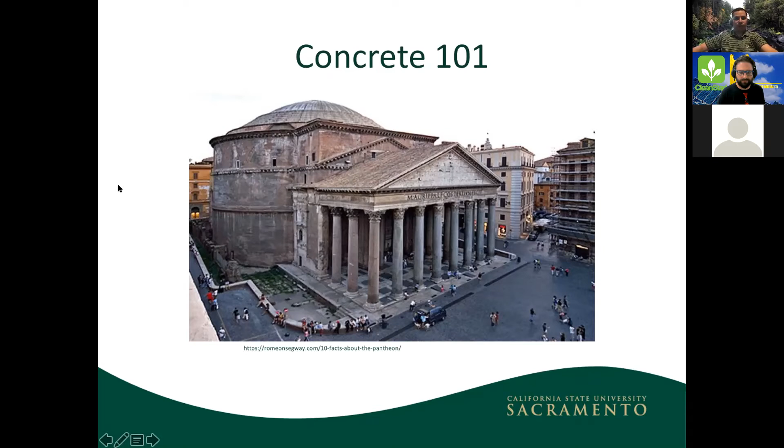All right, so going back to one of my biggest pet peeves, cement and concrete are often used interchangeably, and they're different things. So just to make sure that we're all on the same page, I would like to speak a little bit about concrete and cement and give you a little bit of background information, because that's going to be relevant for the presentation today. So cement is actually not equal to concrete. Cement is the gray powder. Concrete is the solid stuff, and cement is an ingredient that's required to make concrete.

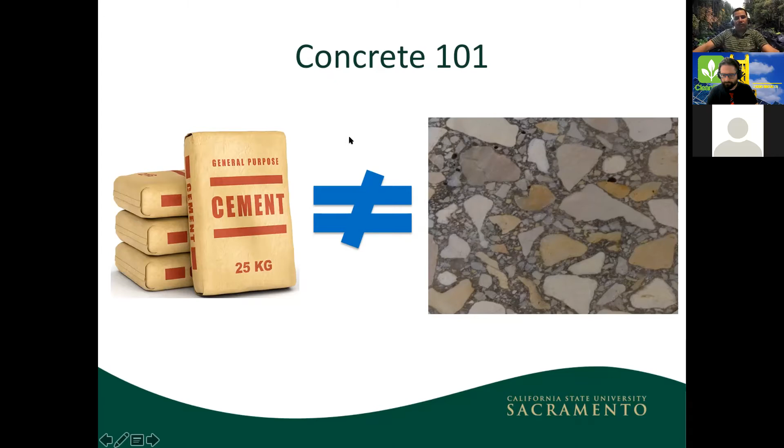So the analogy that a lot of people like to use is the analogy of a cake. Cement is to concrete as flour is to cake. And this works out great because if you look up, for example, fruitcake, you can see that looks very, very similar to concrete, where we have the cement and the water combined to form a paste. That's what holds the cake together. The rest of it is aggregate, basically sand and rocks.

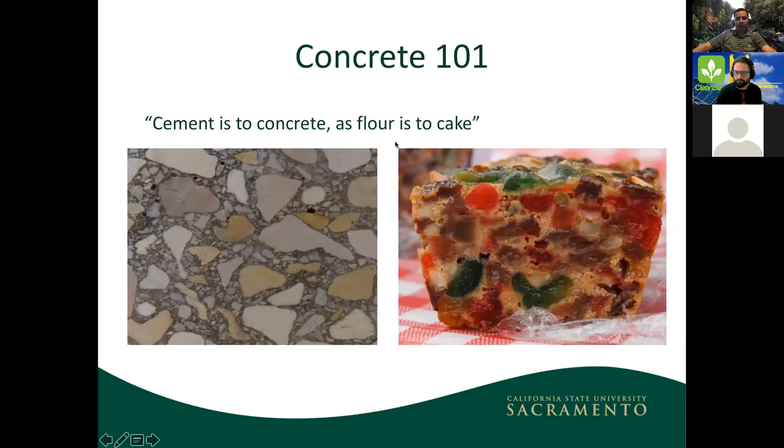That's the vast majority of the concrete that's held together by that binder, by that paste. Okay. If we were to look at it in a little bit more detail, this is what's required to make concrete. I have to have some cement, the gray powder. I have to have some water. Here's my rock and here's my sand. I get all 4 ingredients.

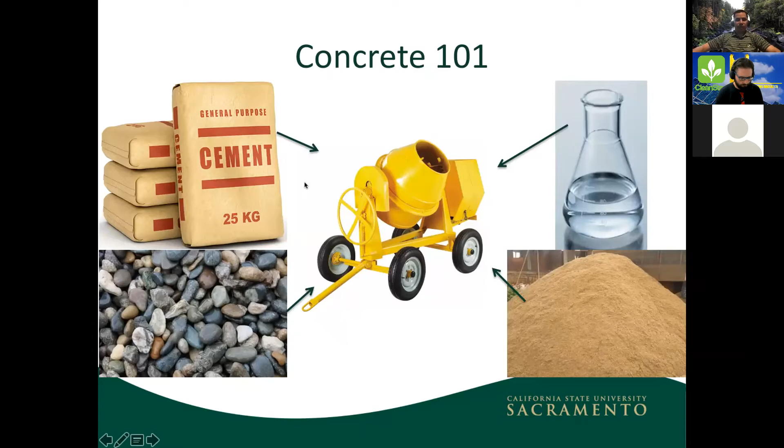I throw them into a mixer, mix for a few minutes, and then I get this material that's going to start out as a liquid. It's going to flow and it's going to take any shape that I want. And after a few hours, it's going to turn into a solid. You can get very creative with it, but this is just your basic plain concrete.

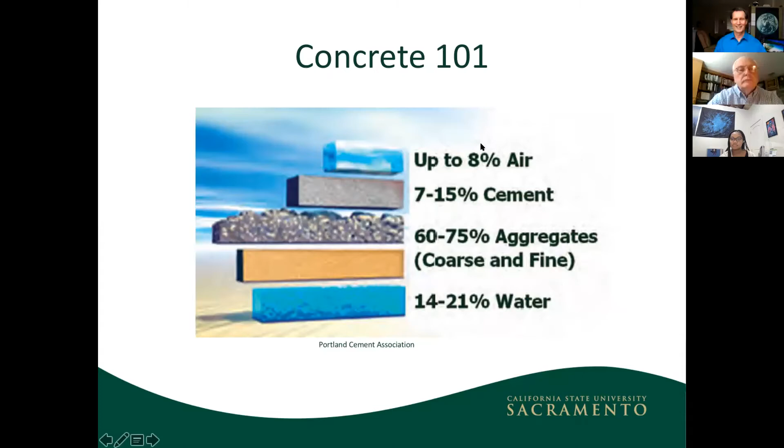And if you look at the ingredients in terms of the proportions by volume, typical concrete is going to look something like this. You're going to have some air in there. Sometimes that's intended, sometimes it's unintended, but that's going to be there due to the mixing action. When you're mixing the concrete, some of the air is going to get trapped in there and it's going to remain there. Maybe not as much as 8%. Sometimes it's going to be around 1 or 2%, but it is going to be there.

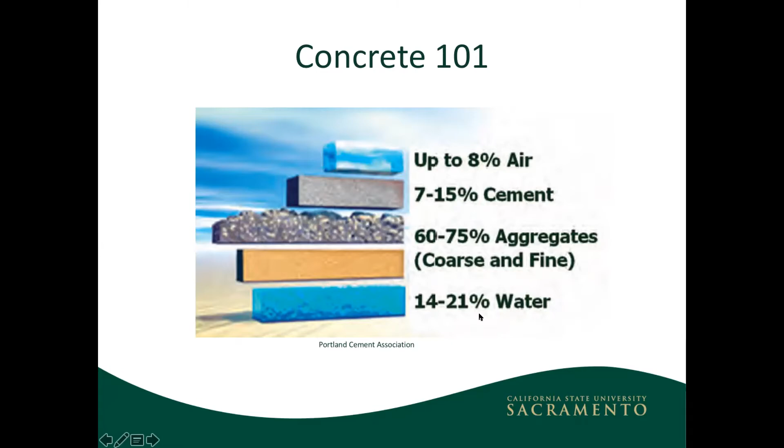Okay, so concrete requires 7 to 15% cement. You can see the vast majority of it is going to be my sand and my rocks, and I'm going to require a little bit of water. Okay, so this is basic plain concrete.

Okay, some quick facts about concrete. It's the most widely used material in the world. It's the second most widely used substance in the world. The only thing that we use more than concrete is water, which is amazing if you think about it. In the US, more than 70% of bridges are made out of concrete.

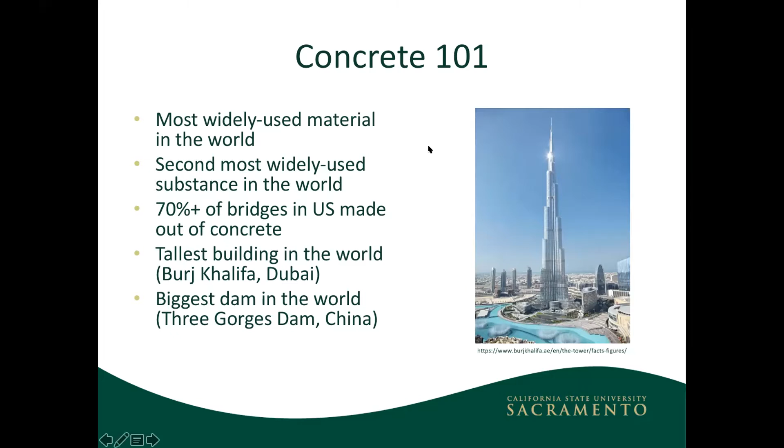The tallest building in the world, the Burj Khalifa, which is located in Dubai, and it's a beautiful building. I forget the exact number of stories. It's made out of high strength concrete. Dams, infrastructure. And basically everything around us is made out of concrete.

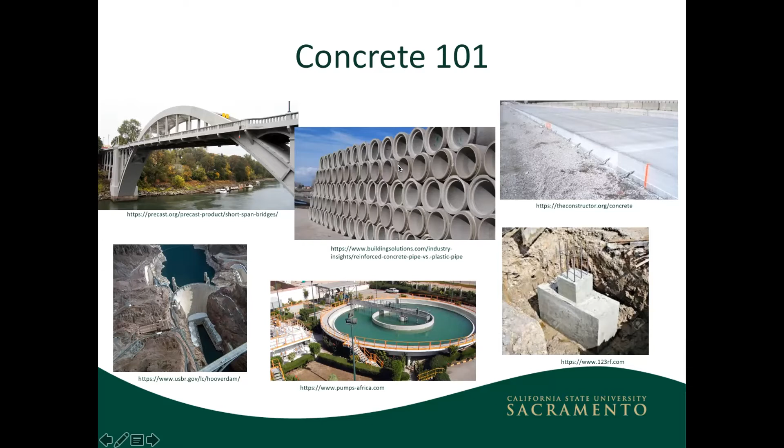So the question is, how do we produce concrete? Well, the very first thing we have to do is we have to produce cement, because cement is the key ingredient when making concrete. We need cement. That's what's going to provide us with the strength. That's what's going to give us the binding ability to hold everything together. Okay, so how do I produce cement?

Okay, so I've got two different things going on here. The calcination reaction is releasing CO2 gas, and also I have to reach a very high temperature in the oven that's going to require fossil fuel burning, which is also going to release CO2 into the atmosphere.

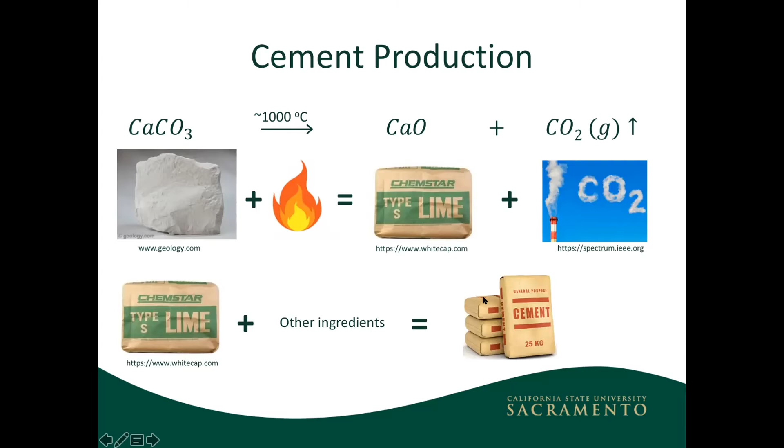Okay, so some people have done an in-depth analysis. The National Ready Mixed Concrete Association has a fact sheet that has estimated that for every kilogram of cement that's produced, there's 1 kilogram of CO2 that's produced. About 60% of that is going to come from the chemical reaction, and 40% of that is going to come from burning fossil fuels that allows us to reach that high temperature. So it's a significant amount of CO2 that's emitted.

The cement production is an energy intensive process. Recently, I would say maybe 10 to 15 years or so, the cement and concrete industry has caught a lot of heat from environmental groups, and rightly so, because there's a lot of resources that go into making cement. There's a lot of CO2 emissions, like I just showed you, and there's a lot of things going on.

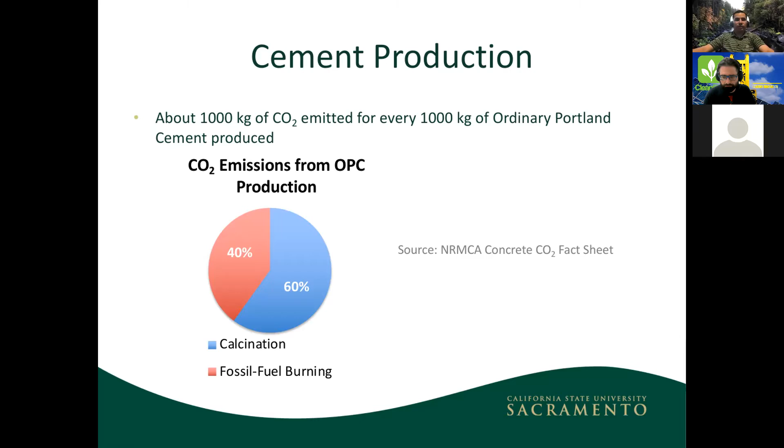You may have heard about cross-laminated timber. It's very popular up in the Northwest. I think Portland and Seattle are making a big push to start building more out of timber. And I think that's great. I think that is one solution to help reduce CO2 emissions. But we shouldn't be so quick to discount concrete because it is a very, very viable material and it's getting even better.

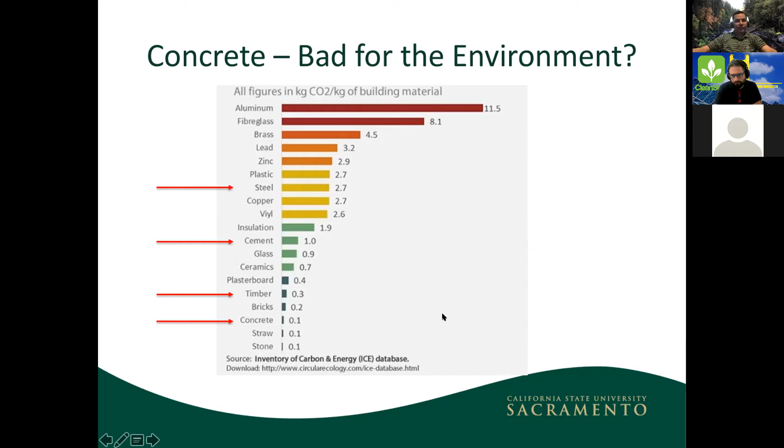The other thing that people don't tell you about concrete is, yes, it's energy intensive, but also we take a lot of waste materials and we put them into concrete. These materials would otherwise end up in a landfill. Nobody has use for them. We throw them into concrete instead of them having to go into a landfill, and it actually makes concrete better. It makes it stronger. It makes it more durable. It makes it less expensive. So everybody wins.

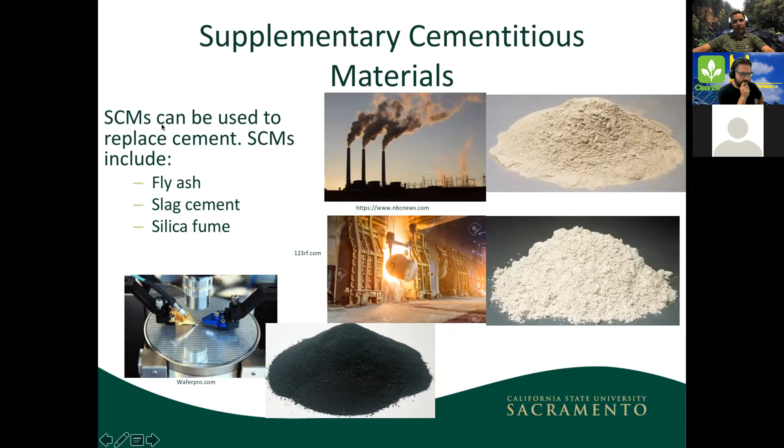Again, we have some waste products, silica fume. That's the dark blue powder that is very, very tiny. It's so tiny that it goes and finds space inside of concrete to fill, and again, it makes it stronger and more durable. So that's one way concrete is helping out the environment, by absorbing these materials and not allowing them to get into a landfill.

So how can we make it even better? How can we produce concrete that is even more environmentally friendly? Well, cement production is the process that requires the most energy, so anything we can do to reduce the cement going into the concrete is going to be helpful. SCMs, supplementary cementitious materials like fly ash, slag, and silica fume, replace a portion of cement. The more SCMs we use, the less cement we use, so less CO2 overall, less CO2 emissions, more environmentally friendly.

There are different types of cement that we can use. One hybrid is Portland limestone cement, which I did a lot of work on during my PhD, and that's something we're going to talk about in more detail in just a second. There are researchers looking into alternative cements that are more environmentally friendly, but maybe a little bit more dangerous to use, so you have to be careful with them. These are more specialty applications.

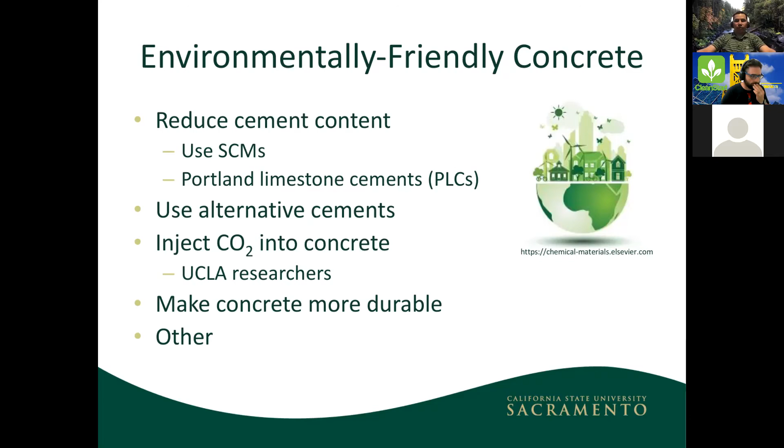Right now, the technology is not there. So I think having research funding go into it, verify it, and give concrete practitioners enough time to adapt and make sure it's a viable solution is going to go a long way, and we should definitely be investing in it so we can take advantage of that in the future. But I'm more of a 'what can we do now' type of person. That's what I'm focusing on.

So what can we do now? Portland limestone cements have been getting a lot of popularity. They're relatively new in the United States, but they've been around for a long time. In Europe, they've been doing research on Portland limestone cement since the 70s. They've gained more popularity in the US, and finally, about 10 or 15 years ago, the standards allowed the use of limestone in cement.

And this is actually what I worked on for my PhD at the University of Texas at Austin.

The Portland limestone cement basically takes some ordinary cement and combines it with limestone that is pulverized. It's ground into a very fine powder and combined with the cement, usually in relatively small proportions of 5 to 15%.

But my research was looking at increasing the limestone portion to as high as about 30%. And why would we do that? If we already have cement, why would we combine it with limestone? Well...

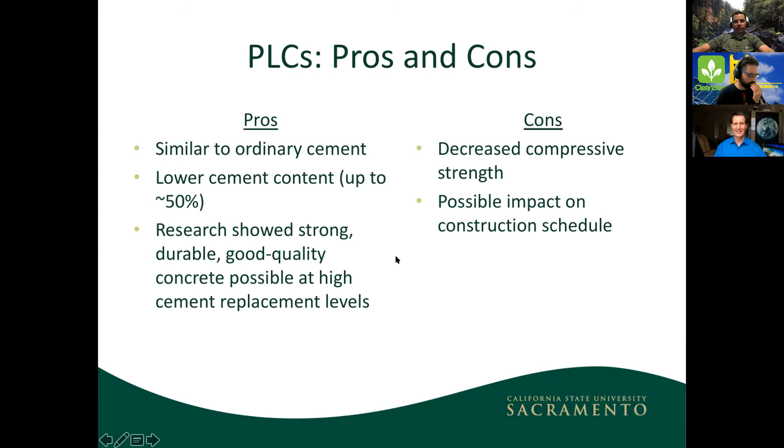So like I said, that was back in 2018. That's what I did for my PhD. And then when I got to Sac State, there wasn't really anybody in the department that does what I do. We've got a couple of very brilliant structural engineers, and I don't really focus on structural engineering. I focus more on the material science side of things.

I study concrete in detail as a material, and I try to make it as durable as possible. I try to make it as environmentally friendly as possible. So basically, when I got to Sac State, I wanted to set up a lab that would allow us to study this. So I'm very interested in concrete durability.

That's my main area of expertise, but I also want to get into other things like structural rehabilitation and repair. Instead of tearing things down and replacing them, it's much faster, less expensive, and more environmentally friendly to repair it if at all possible.

Looking at novel materials that's going to help out the environment. Ultra high performance concrete. Thomas, this goes back to the article that you sent me. Because graphene is a very strong material, it's going to make the concrete super strong. If the concrete is super strong, we can get away with smaller elements, smaller columns, smaller beams, which is going to require less concrete, and again, less cement. So more environmentally friendly and sustainable infrastructure.

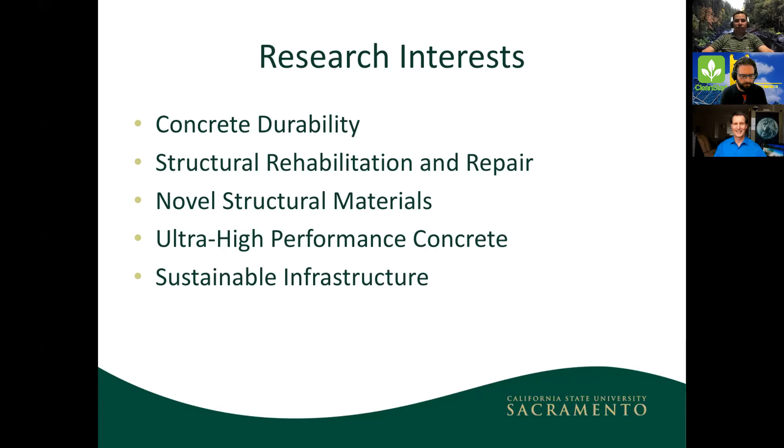And the approach that I'm taking now for my research is a combination of these things. I've got some graduate students that are interested in what I do, and we're going into the lab. Unfortunately, with the pandemic, we had to slow down a little bit. But now that we're seeing the light at the end of the tunnel, we're ready to get back into the lab and hit the ground running.

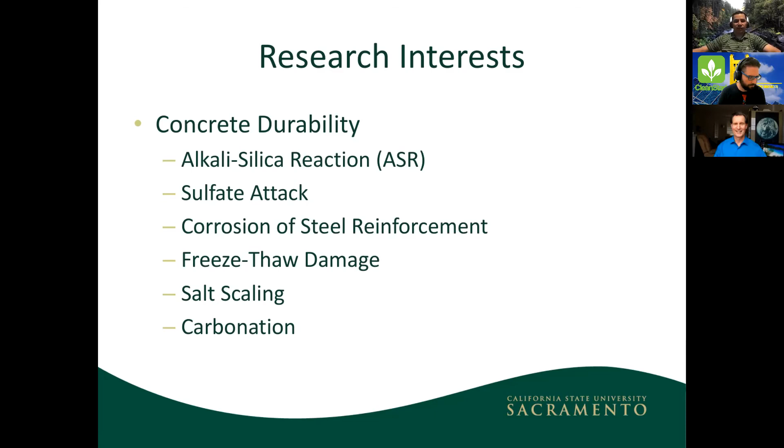The other very nice thing about having ended up in California is that there are a lot of, fortunately for me, durability issues. Where we live in California, there's a lot of alkali silica reaction, which attacks concrete from the inside. There's a lot of sulfate attack because our groundwater, our soils have a lot of sulfates. When they penetrate concrete, they start attacking it, they start kind of eating it away. I have some pictures here on the next slide, but these are very, very common in California.

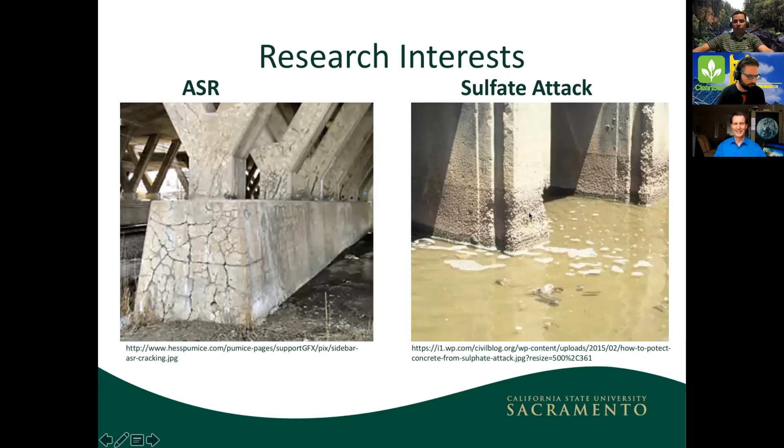The picture on the left shows you what alkali silica reaction looks like. This is very, very typical. And then you can see the picture on the right where the concrete is right up against the water. It looks like somebody's been eating away at the concrete, and that's essentially what's happening with the sulfates penetrating.

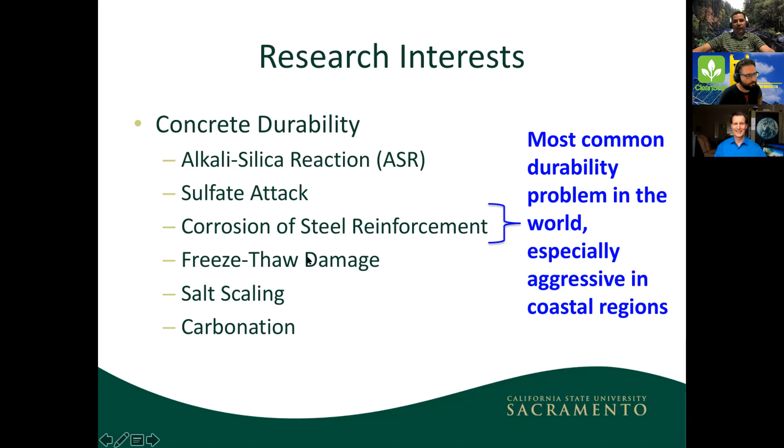It's very aggressive in coastal regions. It's also very aggressive in colder climates, like in the Sierra Nevada region.

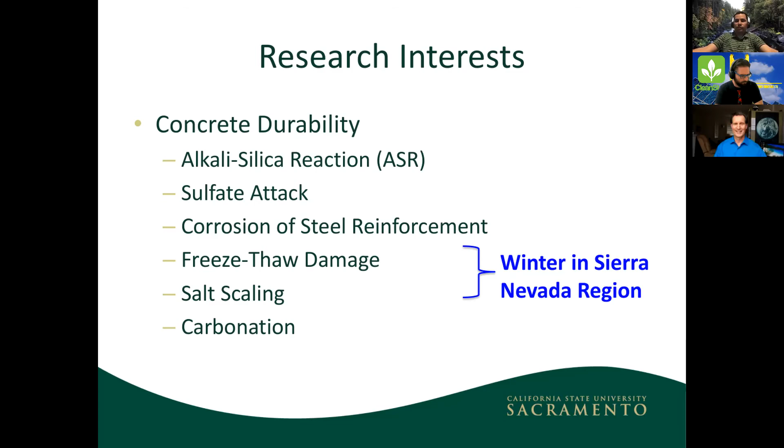There are other things that attack concrete. Freeze-thaw damage, again this is in the Sierra Nevada region, where we have a lot of cycles of freezing and thawing. Basically, you have water inside of concrete penetrating it, temperature drops down, the water freezes, and it causes the concrete to start exploding from inside. Very similar to what would happen if you got a Coke bottle and stuck it in the freezer and left it overnight. That Coke bottle is going to explode as the Coke freezes.

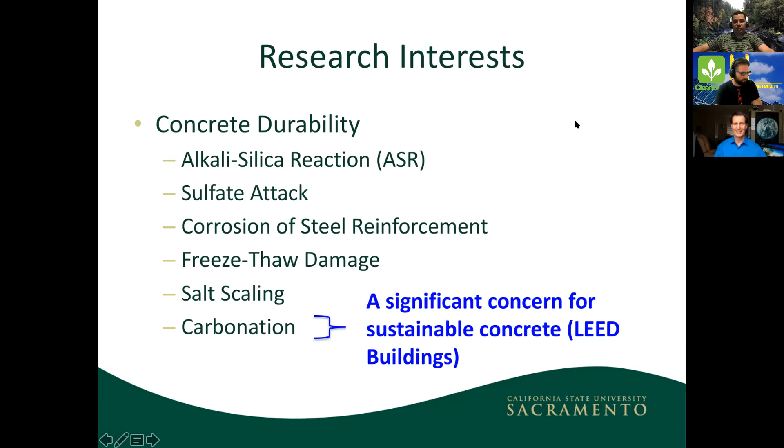So there's a lot of different things that we have to be careful of, especially as we're looking at these new materials. We have to make sure, are they still giving us a durable product? It doesn't matter if we're using 10% cement. If it's going to last us 6 months, it's of no use to us. We have to make sure it's still a durable material.

It's easier for the concrete to carbonate. It lowers the pH, and when the pH is lowered, it makes the steel more prone to corrosion. It's not as well protected.

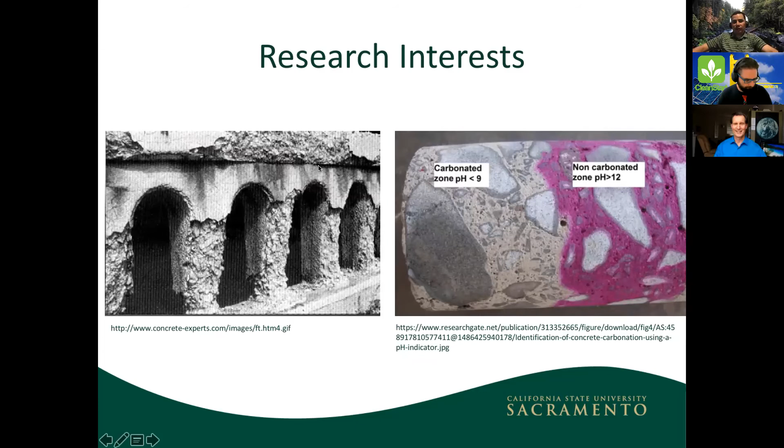So what I want to do is basically simulate the type of lab I was working at when I was a student at UT Austin. Get the new materials, cast concrete samples, put them out, expose them to the elements, and see what happens. Basically invest the time and effort to see if these materials are viable. This is a picture of...

Let me just ask - I mean, we're pushing on time here, but obviously we're all concerned about the building collapse in Miami, and I see now there are several mechanisms that could have contributed to that. I'm sure you've looked at it. Do you have any comments on what happened there?

You know, I have kept up with it. I don't want to get into specifics because I don't know the full story, and it would be inappropriate for me to say this is what happened. But I think probably a combination of things. There was the California Structure Safety Commission or something like that that commented on CNN, mentioning corrosion was probably one of the factors, because the condo collapsed on the seaside, where corrosion is known to be more aggressive - chlorides getting in there and attacking the steel. So I think that had something to do with it, but they're still looking into it.

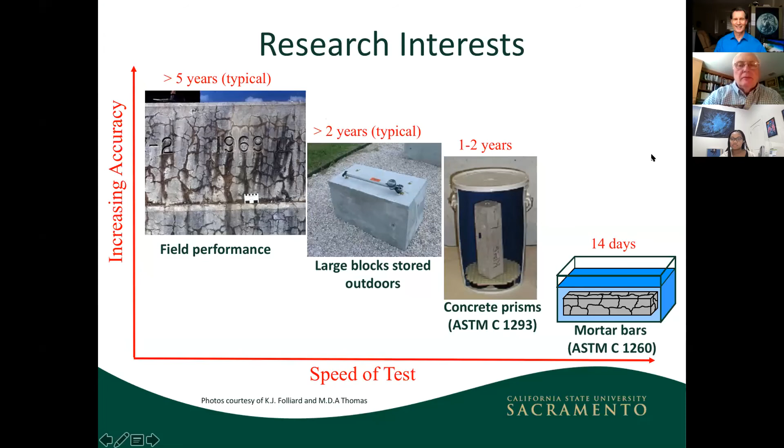I'll skip over this slide. Basically, this is telling you that we're trying to do long-term testing, because that's going to give us the best data instead of the typical lab testing that we do. This is at the University of Texas at Austin, where my advisor started doing this 20 years ago, and these blocks are still being monitored today.

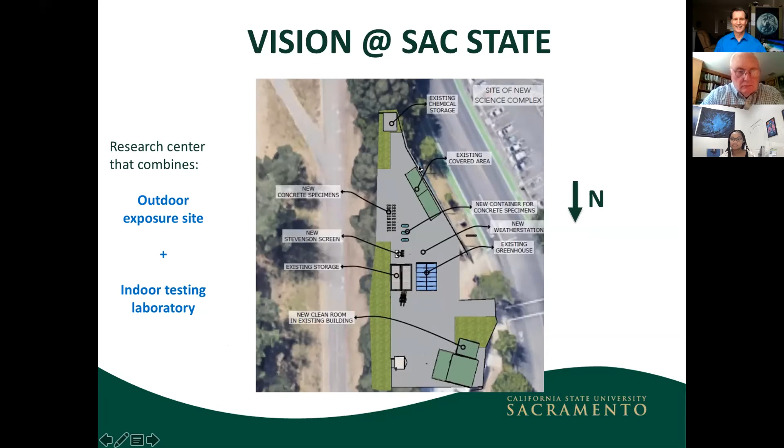Lab would be located just down the street from it. This is a plan view of it. So the indoor lab would be here. That's where all of the fancy equipment is going to be located. And then I'm hoping that you can see my pointer here, but the rest of the specimens are going to be located throughout the lab.

This is a picture showing what the inside of the lab is going to look like, and some of the labs already in place. This is going to be known as the Advanced Laboratory for Infrastructure Materials Research, or ALIMAR. Basically, this is going to allow us to, number one, prepare students for a career in the concrete industry in the future. But it's going to basically give us a means to invest and hopefully get a lot of very useful information that will pay off in the near future.

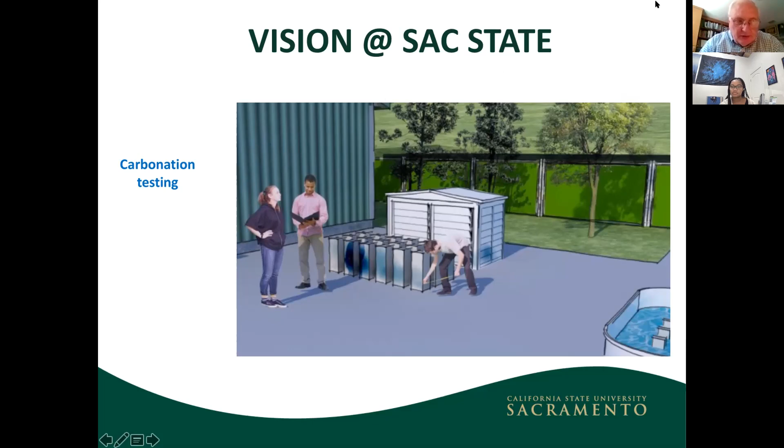But big round of applause for Professor Garcia and the presentation this morning. Fascinating. Thank you. Well, there's also been an interest in looking at not only green concrete, but green steel. Steel creates a lot of CO2 emissions too. And we'll try to get something together on that. But fascinating stuff, and so glad to have you in the community, Professor Garcia, and worrying about problems like this.